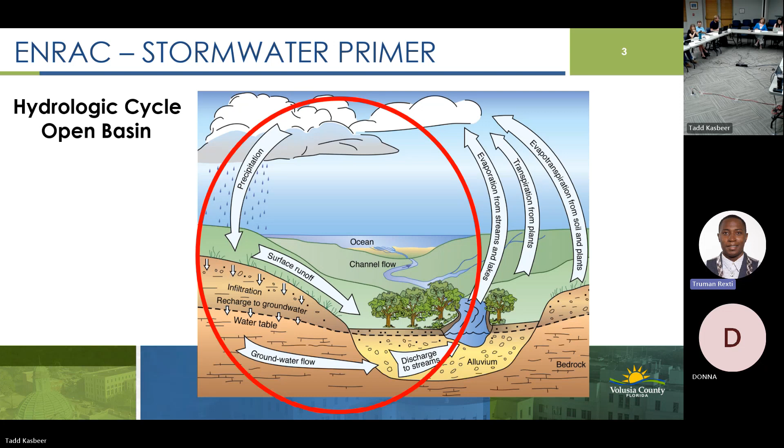So stormwater attenuation - attenuation is a fancy way to talk about flooding aspects. Stormwater rules are predicated basically on two things: one, making sure you don't flood out your neighbors, and also treating water. We'll talk about the treating quite a bit later on overall, but flooding or attenuation is the primary aspect, and usually the one where you feel the most immediate effect.

The state statutes are pretty simple in this regard. Basically, if you have an existing site, you are allowed to have the same amount of water at the same rate flow off of it. So if you have an existing piece of property with nothing on it, the amount of stormwater runoff coming off of it, both the volume and the rate, are the same amount as if you came in and decided you were going to put a Dollar General or a subdivision or something along those lines on it.

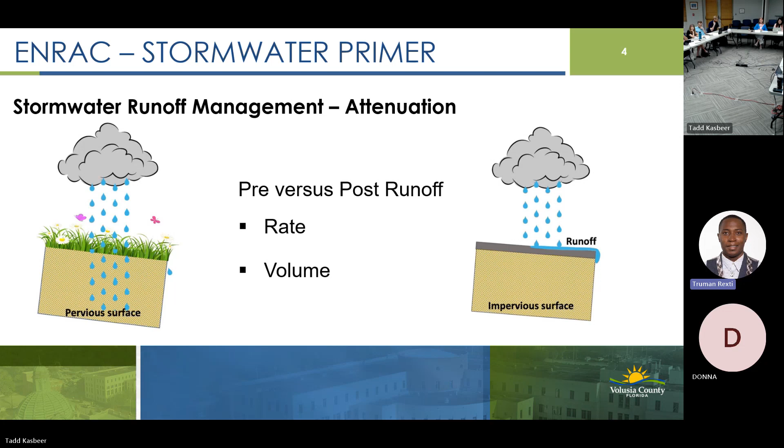So you're going to be coming in, changing the surface, increasing that runoff. It's your responsibility to hold that difference or restrict it so that your downstream neighbors don't see more water, or at a greater rate, than what they did before you built anything.

So how do we do that? We've got to manage that stormwater runoff. Surface water runoff is the most important aspect of it because, as you can imagine, it runs much quicker, moves much quicker than the groundwater flow does. So figuring out the stormwater runoff is the key factor.

So how much stormwater runs off of a particular site is based on three different factors: the overall size of the basin, the area that the stormwater is falling in; the rate at which water either infiltrates into the ground or runs off; and finally, the overall size of the storm is a large factor in how much water will be coming off of the basin.

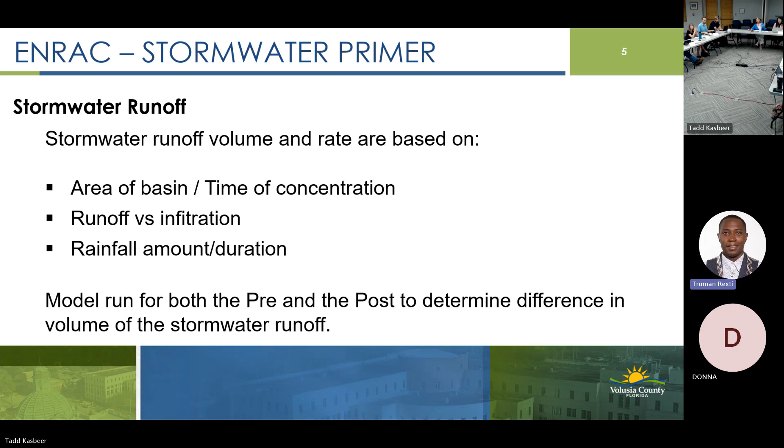Question? Yes, ma'am. Probably too geeky at this point, but given our experience with hurricanes Ian and Nicole, and the fact that we've had a couple of 100-year floods plus, do we use the most recent data set so that those events are incorporated into the reference data for determining how much water is involved?

We will get to that in just a little bit. Okay, thank you. And I'm basically taking it in the order that I just had it, so we'll get into the basins first, and we'll get into the runoff rates, and then we'll get into the storms and how we get into that.

And that is a good point, though. With everything I'm presenting here, I've tried to take all the technical aspects out of it. We won't show any stormwater models. I'm not going to get into equations, and I'm not going to ask anybody to run an integral or any of that kind of crap.

I know Tyler was looking forward to that. That's tragic. He'll be disappointed, but I just wanted you to know you were doing it.

But I am trying to keep this as simple as possible overall. One of the things we're going to do is run through this real quick, and then I've got a certain site that we've done in the last 6, 7 years—well, actually, I guess it's now about 10 years. So we can walk through it with that so you can see how these different things are applied, and there will be some technical aspects, but I'm going to skip over a good portion of that.

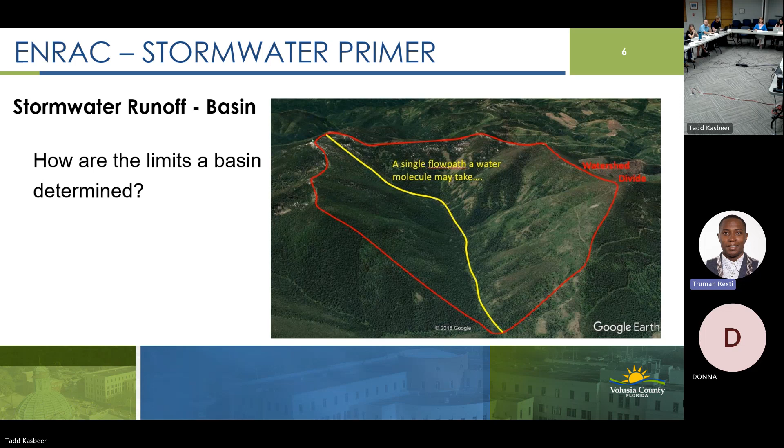So south of us into Brevard, the headwaters of the St. Johns River would be part of that basin. That said, we're not studying that entire area to figure out if your Dollar General or subdivision is going to have more runoff—you're doing a more localized sub-basin aspect of it, and that's what we'd be looking at on particular developments. We also have different types of basins; not every basin's collection point ultimately results in water making its way... Do you need to let somebody in or something?

Not every basin is open to the ocean. The basins that are, we call open basins - the water ultimately makes its way by surface path to the ocean using even a medium-sized storm. Closed basins, or landlocked basins, are pretty common on this side of the county. These are basins in which the water never actually leaves the area - it goes to the lowest point in that basin and has no flow path to get out. So there's a big distinction between the two.

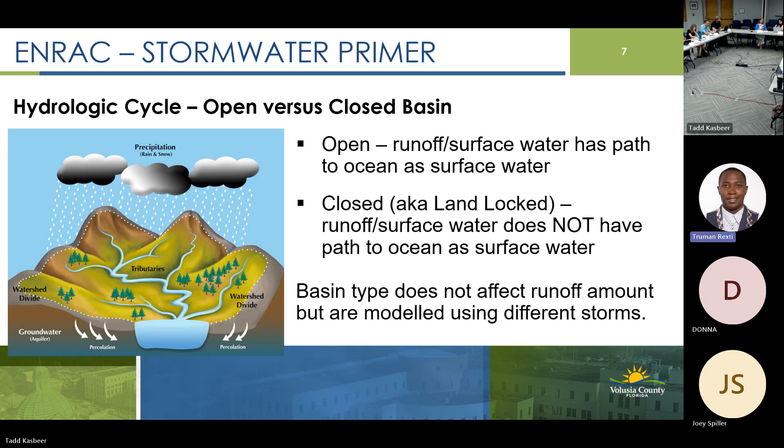Ultimately, how the stormwater is handled doesn't change very much, but it is handled a little bit differently when it gets to how we manage the stormwater overall.

So now we know what our basin size is, the next thing we've got to do is figure out how much stormwater runoff we're going to have versus infiltration. As you can see with the two pictures, you've got your pervious condition, typically what your existing site will generally look like - maybe a few more bugs and bunnies on it. Then afterwards you come build your Dollar General or your subdivision, and now you've got pavement. So the surface cover is usually your biggest determining factor in how much water infiltrates.

That said, other factors can play a big part. Slope of the ground - in Florida that's not much of a problem, but if you go to North Georgia or the West Virginia hills, you've got steep slopes. It really doesn't matter if the ground is great for soaking in water or not - the slope is going to cause it to run off. Here in Florida, where our biggest hills are 3 feet tall, that's really not much of a factor overall.

The soil type also has a big effect. If you go to the beach, you can see the water moves right through that sandy soil very easily, doesn't get impeded in any way, shape, or form - certainly compared to clayey kind of soils or organic material like potting soil, which are designed to hold that water, grab it, and keep it.

The next aspect is voids in the soils. A lot of times this is about how well the soil's been compacted. If they're bigger grains of sand, they're obviously going to have greater voids. If they're smaller types of soils, then there aren't going to be as many voids overall.

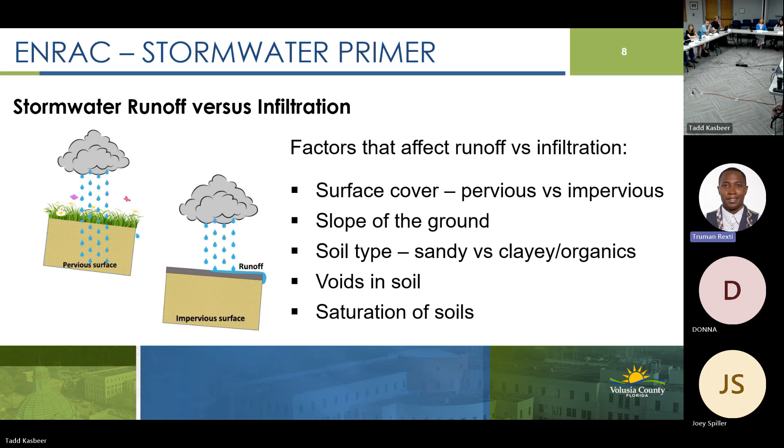Now we've got to take those criteria and turn them into something we can use in our stormwater models, because that's the important part. There are a couple different factors, like we talked about, in how we assign a value to that existing ground. The impervious surface, as you see up there, is pretty easy to assign - sidewalks, parking, buildings, asphalt, concrete, basically all of those we consider a 98. This is called a curve number, and it's not really a percentage, but it's a similar concept, so we'll just consider it a percentage for purposes of this discussion.

Basically what this is saying is that for those impervious surfaces, 98% of that water is going to run off - there's always a little bit that percolates into even the hardest surface overall, so we'd assign a 98 to that. Then you can see below the other different types of ground cover and soils you might encounter, everything from open space lawns that most of us have, to dense forest. So the other factor we talked about was the soil characteristics.

We assign soils grades, A through D. A basically means it's well drained, the water moves through it at a very good rate, it doesn't hold it very well. D soils are at the opposite end of that spectrum, you've got clay, you've got organics, things that would either slow water down or, like with organics, actually grab that water and hold onto it. So there's a range in between. That's what the A, B, C, D across the top portion is. Depending on your soil type, your ground cover, those things, you're assigning a curve number to that particular section.

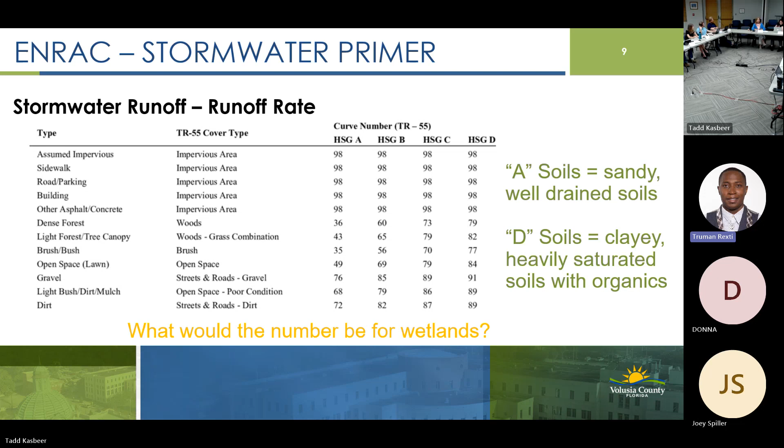So we started talking a little bit about this, the last aspect, about the math going into getting to the ponding element of this. Wouldn't the root structures of the highly dense organic areas, the high vegetation areas, create voids in your soil?

It can, yeah. Keep in mind what we're talking about is the amount of runoff that's created overall, not the groundwater. The runoff is the amount that's not retained, not absorbed in the ground. Right, doesn't percolate.

Infiltrate. So with that being said, in this process, if the foundational math - sorry for getting really technical here - aren't talking through or accounting for the root structure voids, and we're ignoring that, saying that's too complicated to throw into this equation, is that not kind of limiting a little bit of that soil storage ability there?

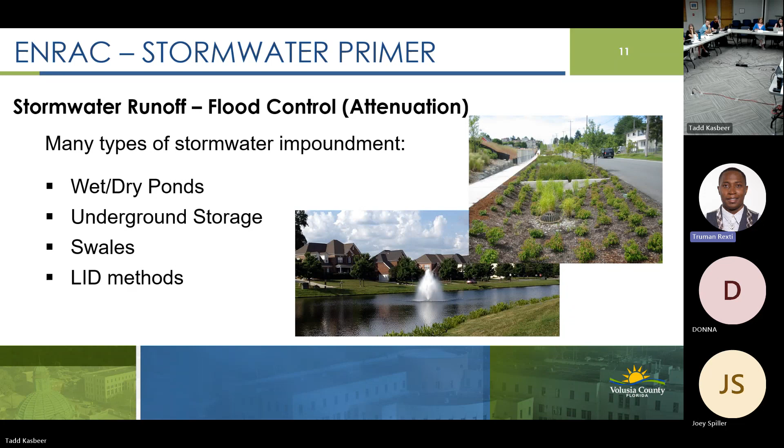Using those previous factors, we figure out the difference in the amount of water that would be running off. Now it's incumbent upon the design engineer to figure out how to impound that volume of water, or slow it down, so that you're discharging at the same rate or a lesser rate than previously. Everybody's familiar with most of the methods engineers use: wet and dry ponds, underground storage, swales, and a lot of LID methods this group has looked at. Those are the common means for tackling these issues.

So how do we go about it? We've got that volume we've figured out. That water has to be stored above the water table, since everything below is occupied by existing groundwater. So we have to go above that. That's the first factor we look at: what is the water table for the particular area overall, along with the runoff volume we just calculated.

We also take a look at the soil characteristics for the area where we're potentially going to put our stormwater pond or whatever method we're using to control the stormwater. And if it's a wet condition, we also have to take a look at the tailwater, which is the area downstream that this water might be flowing into if it were an open basin.

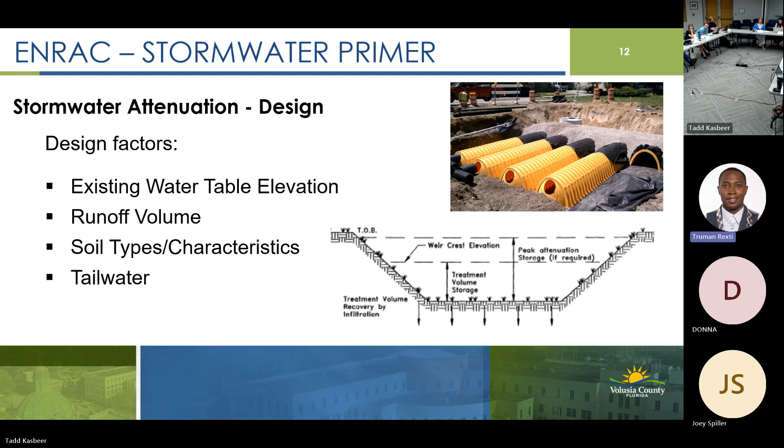So once we know what the water table elevation is, that pretty much tells us what type of system we're going to be using, whether it's wet or dry. If the water table is close to ground level overall, you're pretty much going to be in a wet condition. There aren't too many types of wet systems out there.

Wet ponds are about the only game in town as far as that goes. So if your groundwater is high versus your ground elevations, then you're going to be with a wet stormwater system. If you've got 4 or 5 feet, something along those lines, then you can start taking a look at other types of systems—dry ponds, underground storage, those types of things. But you've got to have the room, the space between the bottom of your pond or your system and that water table elevation.

Now, to Sarah Lee's question with regard to setting that water table elevation—one of the things done prior to beginning work is that you'll get a geotechnical engineer out to the site, and he'll take borings across the site to identify what we call the seasonal high water table, as well as the existing water table.

Now, the existing water table can fluctuate, so we don't rely on that. Depending on when you do the boring, if it hasn't rained in 6 months, that water table is generally going to be depressed compared to its normal elevation. Your seasonal high is basically, during the rainiest portions of the year, what does that water table elevation come to? Now, you almost never end up doing your geotech borings during that time of year.

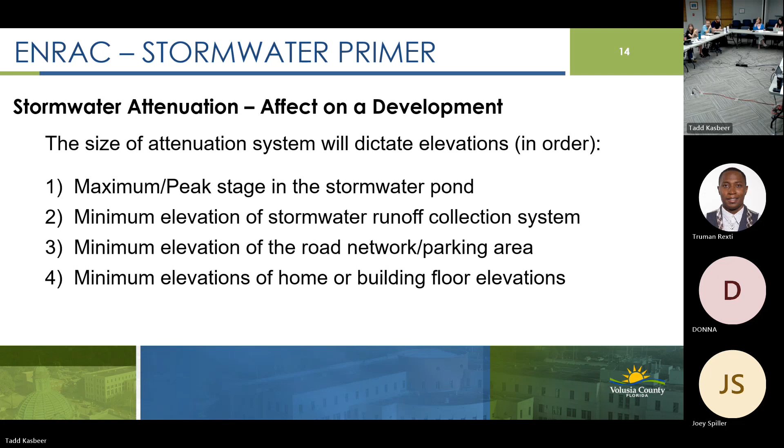So, oh yeah, I'm sorry Alex, trying to get it down there. I'm trying. Pat, you're not off the hook yet. Alright, Alex and Tyler both had questions too. I'm so sorry, Alex first, Tyler's always next. This may be a little out of sequence for what we were thinking. There's no sequence with any of that. By all means, go ahead and ask.

With that being said, using, I'm assuming, like Atlas 14 or something like that as the basis for the rainfall precipitation totals. With the Resilient Florida program and the CRS program, they're asking local governments to look into NOAA intermediate, low and high for the 2017 projection there. There's discussions to update it to 2022. If you look at that as the foundation, you've got the sea level rise element, adjusting tailwaters and things like that. But then concurrently, with that research, there's DoD research that suggests by 2040 there's 1.14 times higher amounts of rainfall than we're seeing today, and by 2070 it's like 1.2, and by 2100 it's 1.3 times more rain. Is there any intention in the county to adjust those factors to try to account for that future flood condition that the Federal Department of Defense is saying is a very real factor?

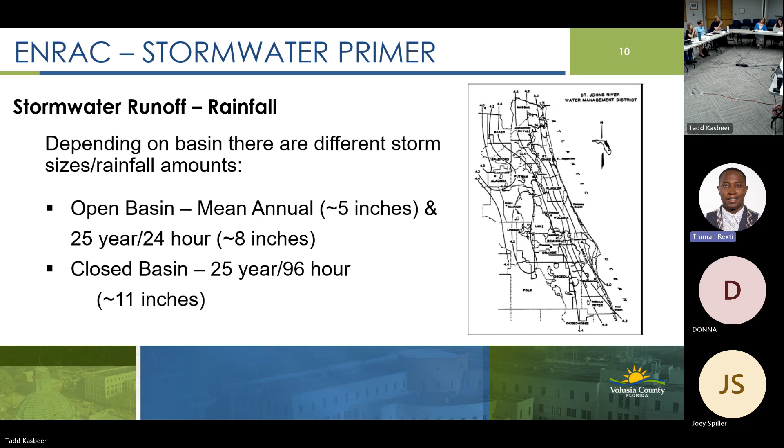So I have a few things I wanted to touch on. The first is, Sarah Lee, you were asking if we've seen the seasonal high water table levels rise over time. One of the things we have that's almost 100-year-old data now are our soil survey maps. They were done all over the state of Florida, but we have one for Volusia County.

I think it was done in the late 20s, part of the alphabet soup of federal programs. And so they mapped all the different soil conditions. If you go 5 feet down, you maybe have a layer of silt or clay or something else, and that'll be described as something you can expect. They have a lot of properties, and they'll have an anticipated water table depth on that.

And they're not perfect. This is 100-year-old data, taken by a grid method before GPS or anything else. But it's absolutely impressive how accurate it is. It matches pretty well with the geotech data that I get today on a site. If it's undeveloped and the area around it hasn't substantially changed, chances are I could plug in the soil survey data and do a pretty good concept design on it, and then when I get my real geotech, have it work. Every now and then I get surprised by something, but consistency hasn't really been the issue.

Like Bob mentioned, the way that we established our seasonal highs did change within the industry, but that's mostly because we didn't have it right originally, and we've refined our method.

Touching on the FEMA maps, they're called FIRMs, flood insurance rate maps, established to set flood insurance rates. We have different flood zones that are the 100-year flood risk zones. Some are based on models, some are based on historic aerials of, hey, this flooded during the storm that fit about a 100-year flood, so we just traced the aerial. As imagery got better and our ability to get instant imagery after a storm got better, the accuracy of those maps improved. So there's a lot of factors, like Tadd was mentioning, that led to the high inaccuracy that we had 20 years ago.

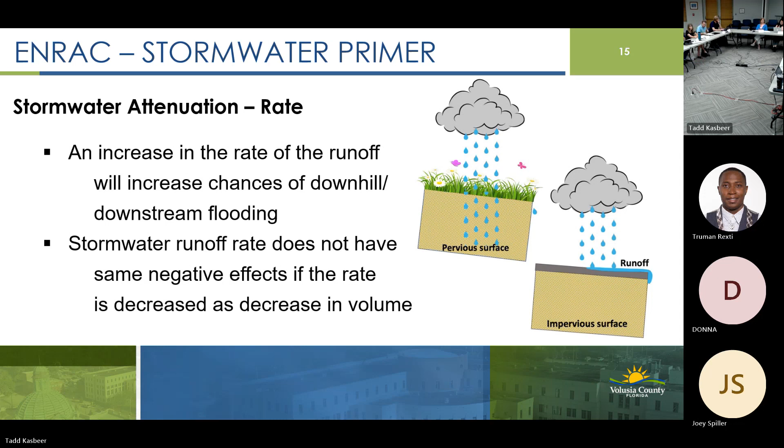How do we do that? How do we regulate the rate overall? We usually put in a discharge control structure. Usually if you look at it on a stormwater pond, it looks like an inlet. The elevations have been set such that water can discharge over time. So for example, if you've got a large amount of water coming in, but you only put in a small 2 to 6 inch pipe, you can really restrict the amount of flow of water out that way. That's generally what we do overall to make sure we're not exceeding the pre-development requirements in that aspect.

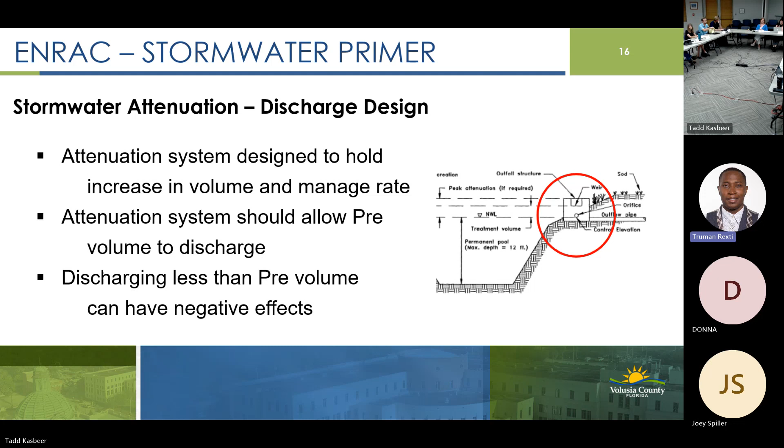All right, so we've now got a full pond, the storm has passed on. It's important that that stormwater system return to its pre-storm condition. You don't want it to recover too quickly, but at the same time, you don't want it to take too long either. The county does not regulate this aspect of it - the Water Management District, the DEP, the state, they do overall. And there are different ways that you can recover your system.

If it's a wet system, you can do it by an orifice - again, a smaller pipe that allows water to flow. You'd set it at the normal water level in your pond, pre any of the stormwater runoff, and with a small pipe it just allows a certain amount of flow to continue over time. You'll still get some percolation even in those wet ponds - it may not be going down, but it will be going out as the surrounding area water table drops after a storm. And in dry systems, you're stuck with percolation - there's really no other way for the water to get out. It just filters into the soil and becomes groundwater, which predominantly mimics the condition that occurred prior to the storm, where you had that much groundwater in the first place.

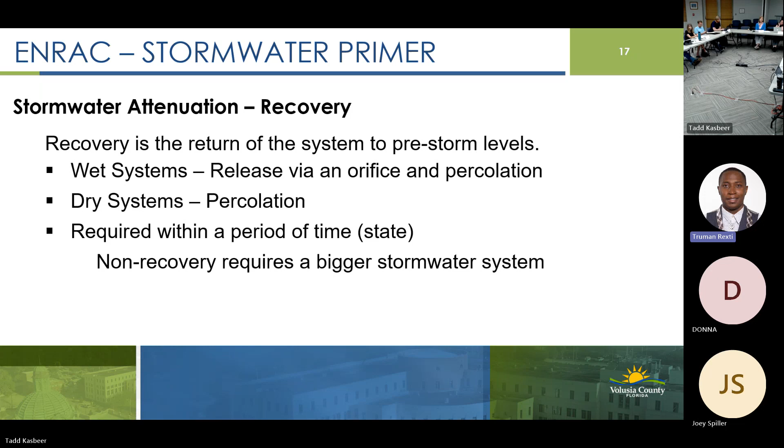So that's the surface runoff. Now we get into groundwater. Water infiltrates via percolation, and then you've got a defined water table that generally sits there. Any new water comes in and generally tries to level out. Groundwater typically mimics, in terms of its elevation, the existing ground - so if you've got a slope, usually your groundwater has a slope to it. It may not match exactly; variabilities in the soil, voids, and all those different characteristics can have an effect on what that water table elevation does as it relates to the ground elevation. But that's generally what it does.

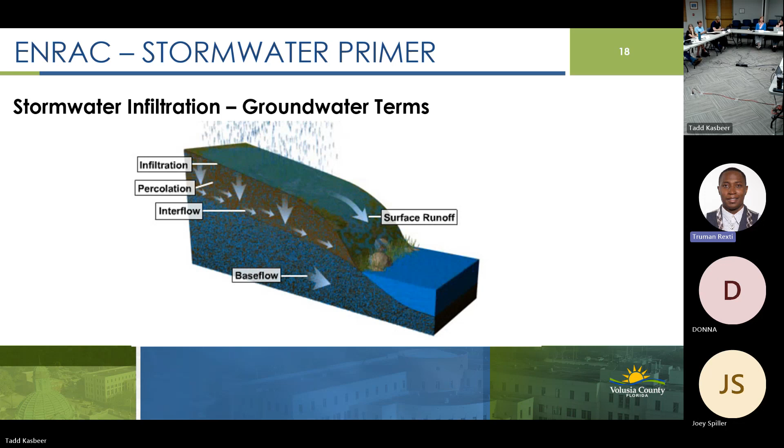So ultimately, during that storm, you're going to have that interflow, as it's identified on this graphic, working to equalize and get back to what it's used to overall. As you can understand or expect, groundwater flows at a much slower rate than surface runoff, which is why if you turn a site from grass and lawn into impervious surface, you get that water moving much quicker than it does through the ground. That's what you're trying to fight when you put in that stormwater system.

The major effect on groundwater is confining layers. A confining layer is just a soil type that really does not percolate very well. It usually acts as an impediment to flow. It doesn't mean it won't flow through that layer, it just means it takes it a really long time to do so.

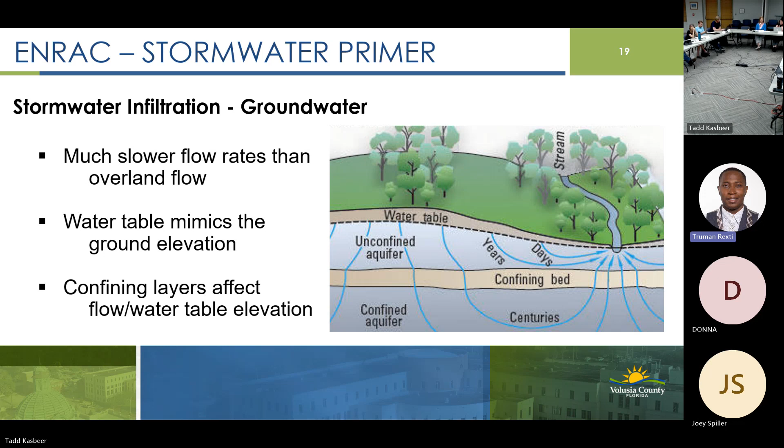That leads into discussion on closed basins, which we talked about a little bit earlier. These are areas where the water falls in that basin and the collection point doesn't have an outfall ultimately to the ocean. West Volusia has a large number of these, and a vast majority of the subdivisions in town, a lot of the developments in town, go to closed basins.

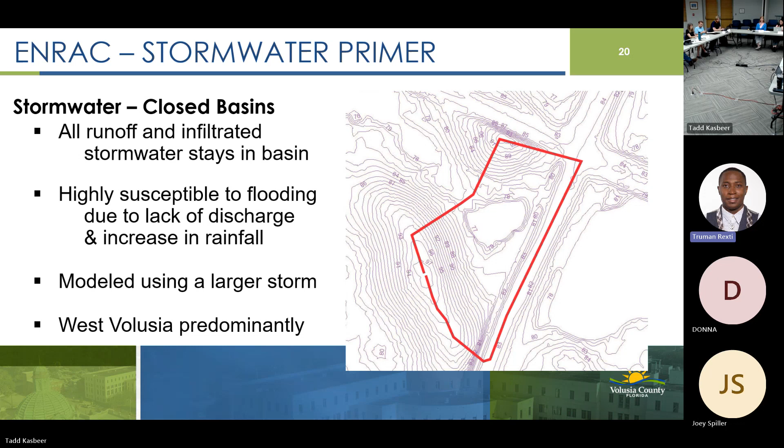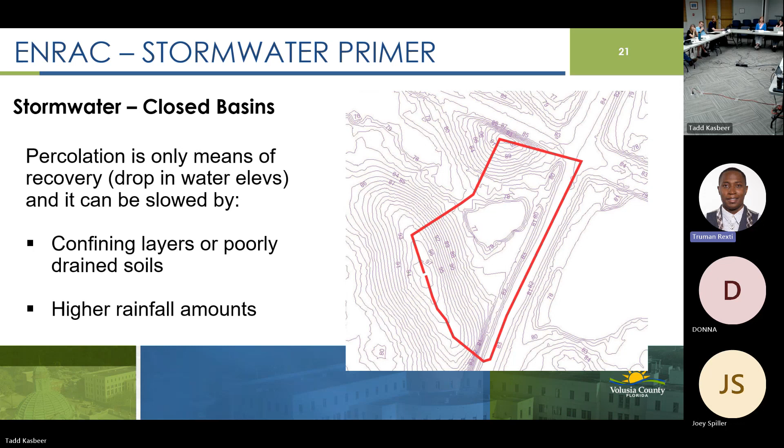The problem with that is those areas are highly susceptible to flooding, particularly if you've got a confining layer, something that really does not allow that water to percolate out. Since percolation is your only means of recovery, a confining layer really kills your ability to recover, as well as higher amounts of rainfall. That doesn't mean a big storm alone - it means continuous rain at a higher rate over a longer period of time, which is generally going to be worse for you than one localized big storm.

Yeah. The only means of recovery is the percolation.

Is there no calculation for evaporation at that point? No. We exclude it to a large part because it's a safety factor. There is some that does occur, but as far as control over that aspect of it, there's minimal control - it's greatly dependent on your weather conditions, your air conditions. And there's no good way to model something you don't have control over.

So this is the average annual rainfall for the city of DeLand. You can see, for example, back in 2000 it was a pretty nice year - 42 inches. Then it jumped up to 76, then down to 62, 53. There's quite a bit of variability really until you get to about 2009, 2010, and then you start to see things generally even out.

The issue gets to be this last 6 or 7 years - you take a look at 5 out of 6 years, you're up above 60 inches. That's a large amount of rain in a short period of time on top of a previous year with that same condition. So you get into those closed basin discussions - when you get those types of situations, you really just don't have the ability to recover, and a lot of these closed basins, particularly if there's a confining layer, you're going to hold water.

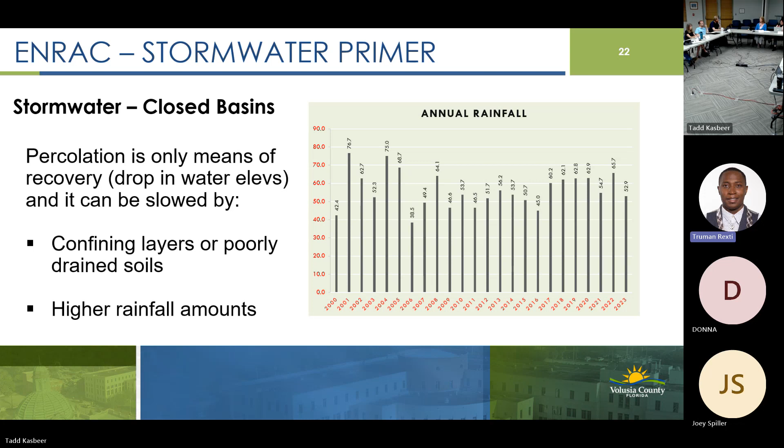So that pretty much covers attenuation and flooding aspects. I did mention we'd talk about treatment, but I don't plan on talking about this too much. The county does not regulate treatment overall. We basically leave that to the state and the feds, largely because we don't have the expertise or chemical capability to make recommendations on something along those lines.

Anytime you're designing a stormwater system, you'll take a look at the water management district criteria. When you look through their manuals, they provide quite a bit of background on the science they performed for generating the amount of treatment needed or developing how stormwater ponds work overall. We don't have the ability to duplicate that, so our recommendation is to follow those rules, or make an effort recommendation, but something that doesn't specifically rely on heavy science to arrive at it.

That said, the Water Management District and the DEP regulate treatment. Treatment is basically picking up that first flush of water that falls in that basin. The idea being that if pollution is above ground, that water hits it and either picks it up or mixes with it and moves on. Any later portions of the storm are picking up at such a diminished rate that it's not worth tracking. So your stormwater pond or system must retain that first flush.

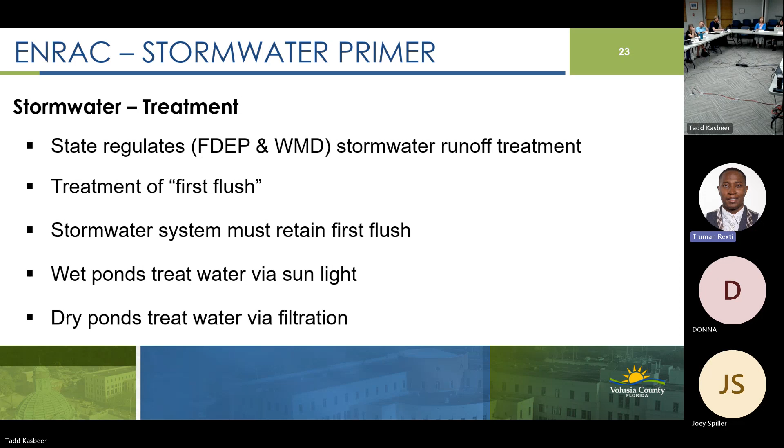So that covers the basics on anything. Go ahead, Bill.

Even though the state regulates treatment, they have special basin criteria for impaired water bodies, right? Correct, different areas are treated to a different level. There are different treatment standards overall, I just gave it a quick brush. The state has water quality data on a vast majority of the basins to identify which ones may be impaired. As part of that, if it is impaired, there's a different criteria for your stormwater, depending on the type of impairment. The vast majority of them are nitrogen or phosphorus.

Yeah, the things you typically find in fertilizer, strangely enough. So your pond design gets modified to specifically try to attack that particular type of pollutant, just keeping it simple. Most of the microbes are doing denitrification, handling the nitrogen load, but the phosphorus typically accumulates unless there's an uptake by plants, and then those plants get harvested and hauled away. There's also heavy metals that can accumulate, which are also not typically handled by microbes.

With wet ponds, we have trouble with phosphorus removal, maybe getting 40% removal. So if we need higher than 40% removal, you usually have to pre-treat with a dry pond or use some other system modifier to get the phosphorus. When you have a dry pond, it goes in front of the wet pond, which means your entire development has to be built up so you can get that positive flow into your tailwater.

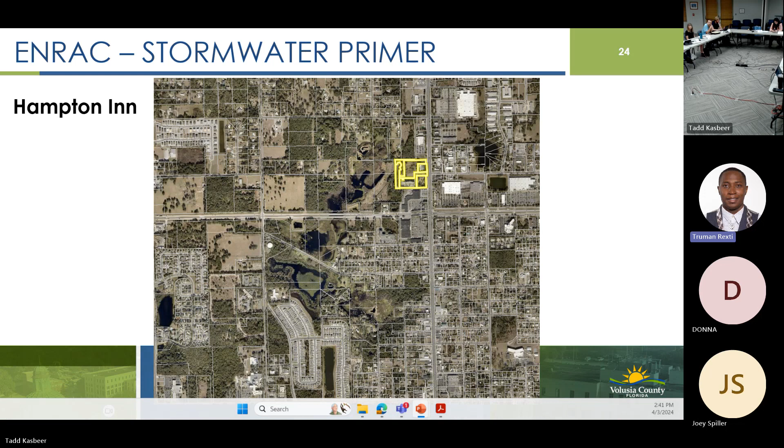The Hampton Inn site is north of town, northwest of the quadrant of US 92 and 17, that area overall. I'm assuming pretty much everybody is familiar with it, but I highlighted it. To the west, you've also got the Lake Gertie area. Part of the reason I chose this was for that basin, as well as being familiar with the area. Lake Gertie Basin is a closed basin.

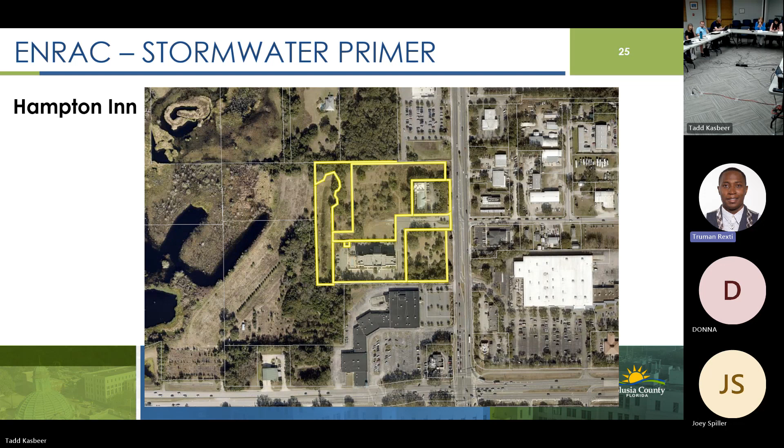Water that percolates down to Lake Gertie doesn't go anywhere. So during the hurricanes, water level there rose quite a bit back in 2005, 2006. It even got into some people's homes on the south end for that reason. But this site, the Hampton Inn site outlined in yellow, all of this ultimately drains down to the Lake Gertie Basin. So it's a portion of it. The Hampton area is actually located basically at the end of this.

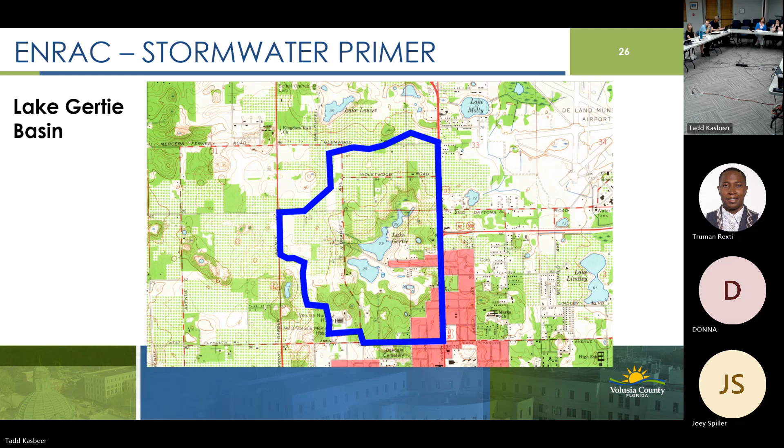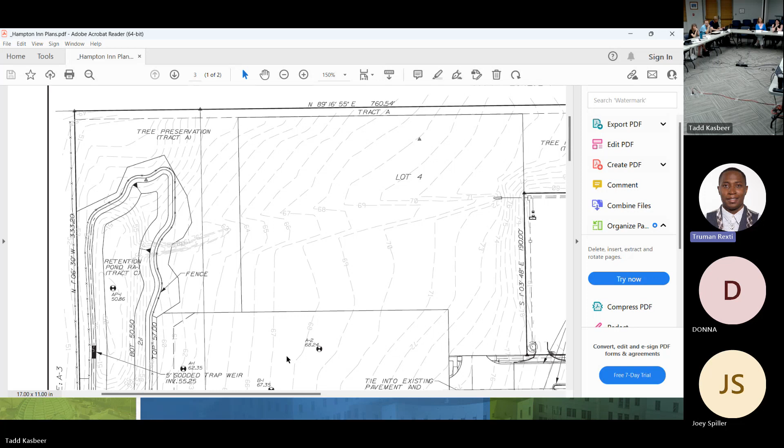When you've got this much fall, it makes it pretty easy to figure out where you want to put your stormwater pond. Water likes to go downhill, so you're obviously not going to put it next to US 17. You're going to put it at the bottom portion of the hill, which is what we've identified for doing. So we're using gravity's effect on stormwater to get it where we want it, either as groundwater or as stormwater runoff. Now, as a part of any of these developments...

We'll prepare a set of stormwater calculations. We've had the survey, we know what we're dealing with, and now we've got to start doing some of the modeling we talked about to figure out how much stormwater runoff is going to occur versus the pre-existing conditions.

So as part of our calculations, we generally put in a summary. We include some reference maps so that everybody knows the area we're talking about, a picture of the existing conditions. Tyler had mentioned, for example, soils maps. This is one of the things we included so you can see what kind of soils types are responsible. We include the floodplain as identified at that point in time.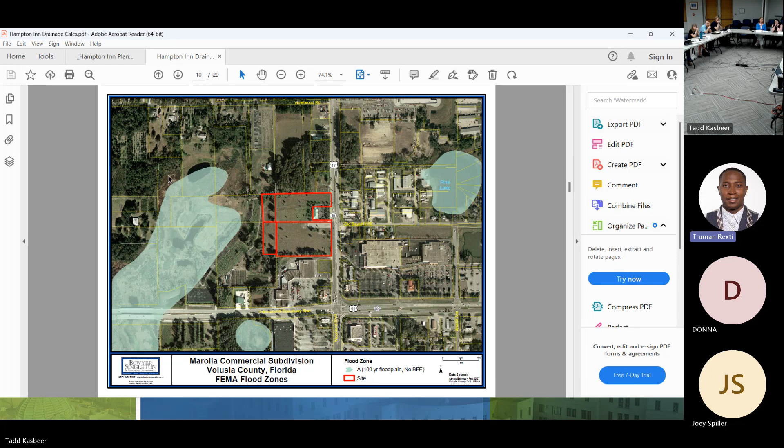Again, you can kind of see what I was speaking to a little bit earlier. That was the line that FEMA identifies. You can see it doesn't clearly match up with what the aerial has and what the actual existing condition was. They were just doing the best they had with what they got. So that would be some of that.

So the first thing we're going to look at is our pre-development. We take a look at the existing condition, take those contours we saw previously, and identify our stormwater basins. Stormwater basically runs perpendicular to our contour lines. That's the premise for figuring out where the water goes.

This was the high area over here at 17, going to Lake Gertie at the bottom area. You can see the water generally flows from east to west, or right to left. Prior to the Hampton Inn going in, there was a bank on the property with this initial driveway for access. As a part of their development, they had cut in this small stormwater pond where the water would overflow from the bank site via a ditch down to this stormwater pond.

So you can see this is the basin delineation. This was, in point of fact, its own sub-basin. All the water that fell in this area made its way here. Then, if it got high enough to discharge, it would overflow into Lake Gertie. If it didn't, it would percolate into the ground and the groundwater would move down to Lake Gertie. We want to make sure we're accounting for the existing condition, which is why we spell that out and identify it as its own separate basin. But on the north side and the south side, those are still Basin B, ultimately making their way down to the Lake Gertie Basin.

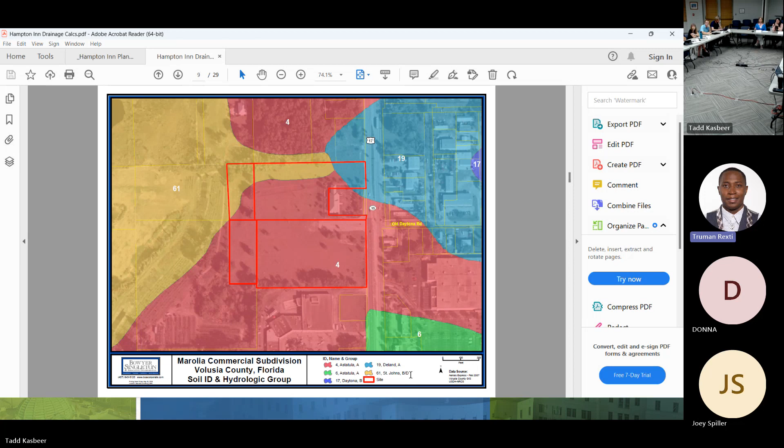So when you get into Basin B, there were two different soil types. Some were A soils - go back up here - so 4 is Astatula, which is an A soil. Then you had 61, which was a BD soil, so you take the worst case scenario and treat it as a D. That's why when you take a look at how we're prorating the curve number, we've got one number that's good and one that's bad. You make that determination based on the amount of area, calculate that, multiply it out, and come to an average.

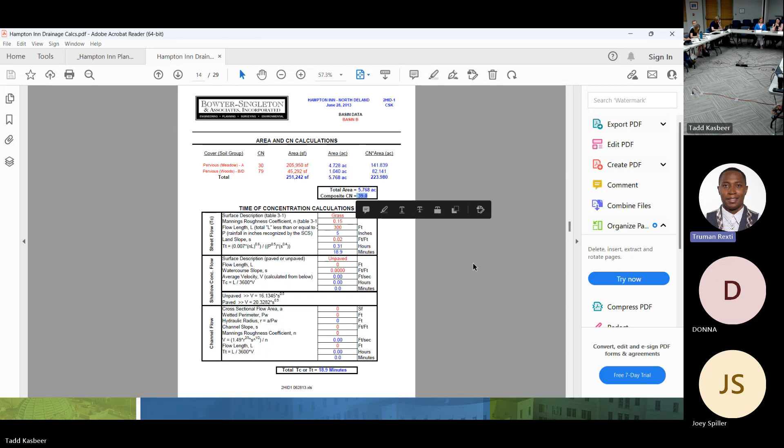And that's what you end up with for your stormwater model for your curve number overall. Again, it's a low number, which means it's soaking a lot of that water in overall. So we've got to maintain that.

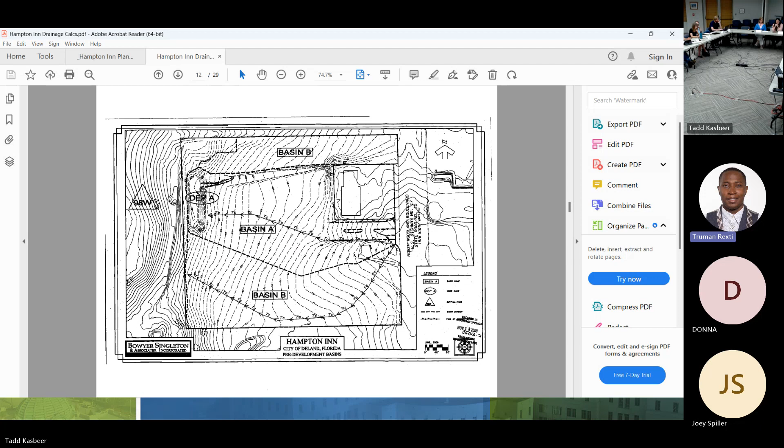One of the things we'll do is, because there is a depression, or in this case actually a pond, we just consider it a depression in the precondition, but we have to model that. We can't just assume or ignore that portion of it. It is holding water, it's impounding that aspect of it, so we've got to make sure we model that in the system overall. So we take that survey information, figure out what the volumes are based on the elevation the water would rise to, put all this into a fancy little computer program, and it tells us our volume and our rates overall.

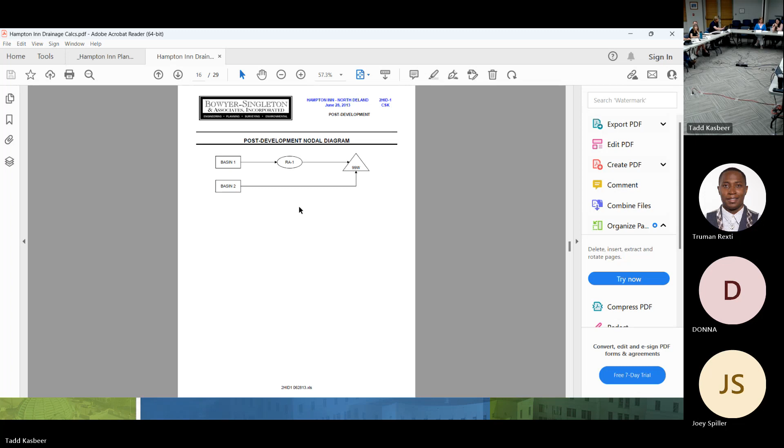Then we do basically that same thing with the post-development basin. We'll put down the different improvements we're putting in. For example, up here, this was part of B. We're not touching anything over here, we're not impeding that, that still flows. So we're trying to make sure that stays out. We don't really want to bring that into our system, or have to treat it or anything along those lines. It's naturally existing, so we want it to stay that way to mimic the existing condition as much as possible. On top of that, if we bring it in, it increases the size of the stormwater pond more than necessary.

So we'd separate that section out, which becomes basin 2, and then we've got basin 1, which now is the area that we've made changes to.

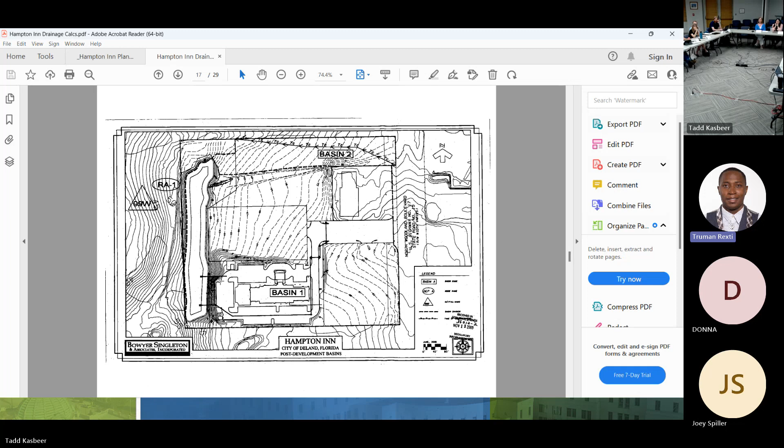And again, we're going back through, determining the area of the bank site, the hotel, pool, sidewalk, parking areas, coming up with that total area. Then again, because once water falls in a retention pond or wetland, once water hits water, it all runs off, we consider all of that area impervious surface, even though that first rain portion is going to immediately soak in and be groundwater. It's a safety factor that we apply in there.

Overall, if we take all of those and prorate them, we figure out what our curve number is in that post condition. We basically put in our pond as the depression now, and run all of that to figure out what amount of discharge we're going to have at that point in time. We know to size the pond for that volume, so we don't have to worry about that aspect when we specifically model — we're just worried about the rate.

Now, one of the things we also take a look at, which we talked about a little bit, was treatment. Obviously you have to treat everything. This is the criteria that the Water Management District basically uses, or used at the time. There were two different categories you looked at: the amount of impervious versus the overall basin. If 1.25 inches over that was greater than 1 inch over the entire area, whichever number was greater, that's what you used for your volume.

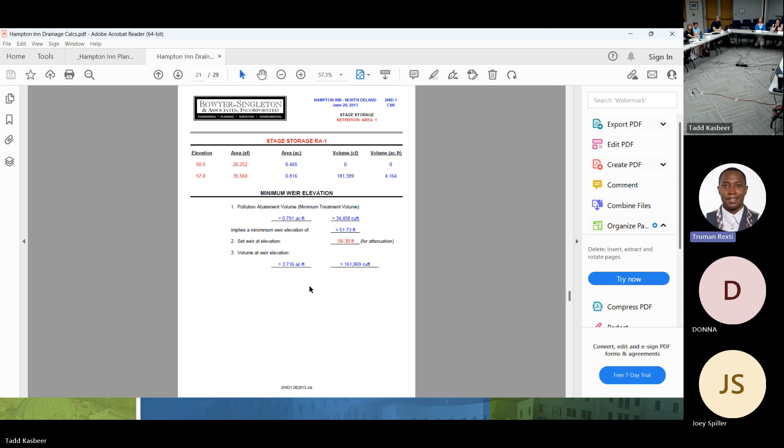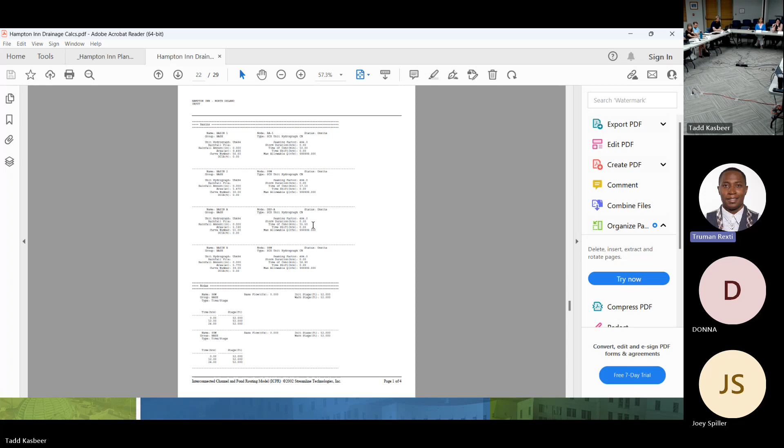So when we calculate the volume in our stormwater pond, we put in that factor as well as what we got from our model to identify our discharge control structure. That in itself is probably more sciencey than it needs to be, but we use that model to predict all of that. So this is the input. As part of the calculations, you always give the input, because unscrupulous type people can go ahead and make changes in there and not publicize it. You want to make sure you have all your criteria that you've used for identifying and running your model, so that if there are any errors or anything needs to be questioned, it's all there.

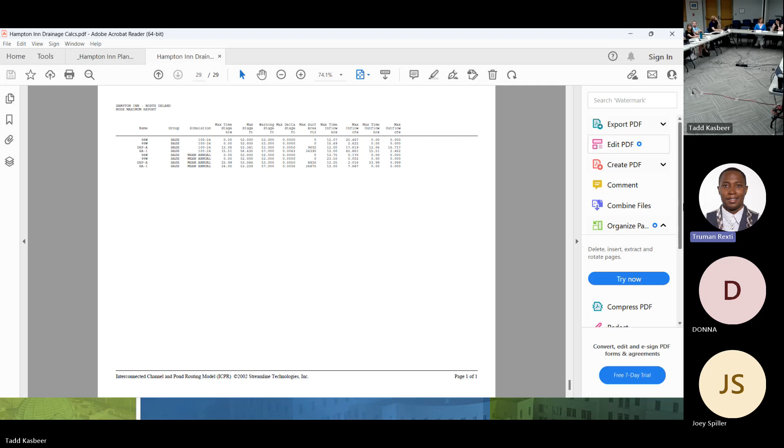And then you go back to this lovely little printout at the end, and this is where you're ultimately making the comparison between the different rates. So depression A, its discharge, and then 98W — I won't get into what the terms mean, but 98W is basically Lake Gertie in the pre-condition overall. So you're looking at what discharge goes to that.

And depression A was discharging 12.6.

Pardon me, I got it backwards. It was discharging 16, and in the post condition we're discharging 2. So you can see we're not discharging very much water at all. That's what your goal would be overall with your system, and that's the requirement you have to meet to get your system in place.

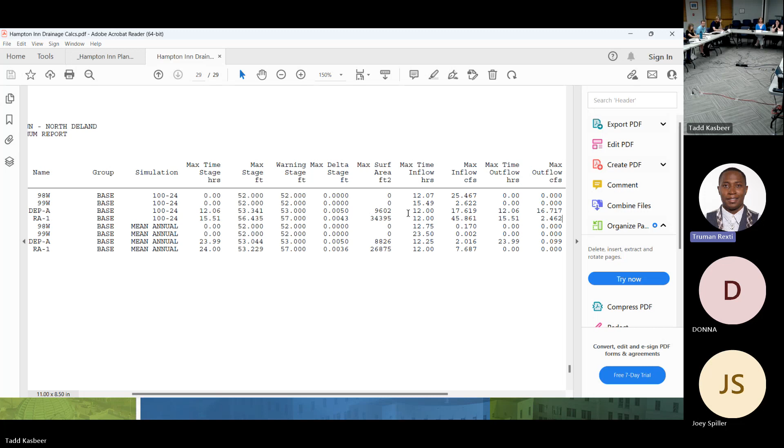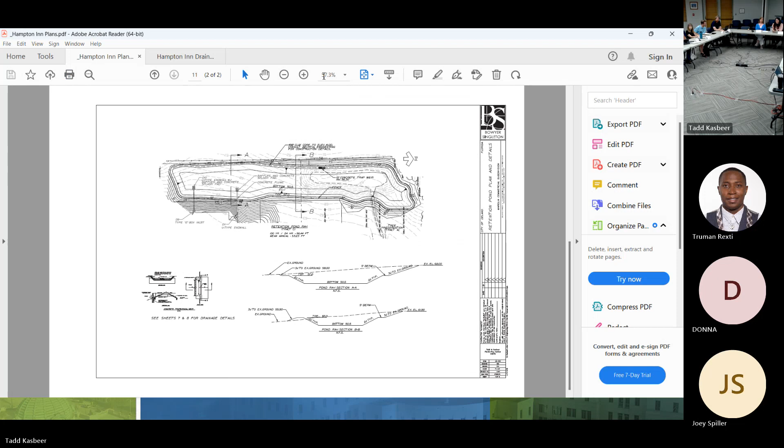Now there are different things you look at outside of your calculations. The numbers are great, that's important, but when you go to your plan, one thing we mentioned earlier was where do we put the pond? We put it at the low spot. When you've got a slope like this, which isn't the regular condition we talked about, basically on a hill, we've built up this downstream side, this being west, the right being north. We've rotated 90 degrees, but you've got a situation where you're building up on a hill, and now you've got the possibility this area may have percolation and actually cause a problem.

So for any stormwater ponds built on hills, one of the best things you can do is make sure the water doesn't percolate through, so it's not blowing out that side and you lose your stormwater pond.

Remember back, I think it was during the 2005 hurricanes, on the west side of town at the Cascades off of 15A, the new section has a pond at the top of the hill, and it had that same exact condition where there was a lot of water coming through, much more than any of the design storms had, and it blew out that side, and all that water ended up in the depression to the south, that sinkhole down there, which is a problem.

So we designed this, and one of the things we put in there, just to make sure, even though we're not really causing much of a bump, that amount of water moving this way is different than what it's typically used to, we went ahead and had them put in what we call a clay core, basically just a line of clay. Remember, clay doesn't percolate very well. It does percolate, but not very well. Basically that cuts off that flow of water in that particular direction.

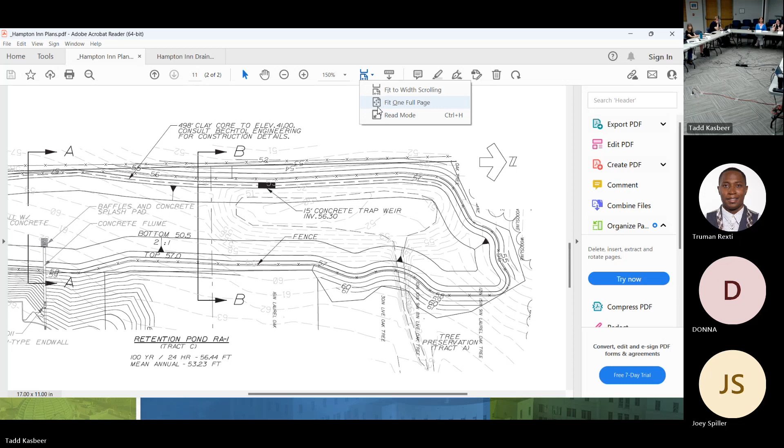No, never had a problem with it. This was built in 2014 and hasn't had much of an issue. Now the benefit it has at this point is that the only thing actually built is the hotel, so it's the only thing utilizing this pond. The pond is designed to be able to take the culvert and this particular lot, not this one. But because there's nothing else coming into that space, the pond is a little bit over designed at this point. I'd love to say my ponds never overflow, and they haven't yet, but that's not why in this case.

Yes ma'am, yeah, everything on that side, sorry, everything ancillary to that use. Sure.

How do you envision that system working there? Or, I don't know if Hampton owns that, are they going to utilize that same retention area, or are they going to have a separate retention area? I haven't actually looked at their particular site plan overall to know exactly what they're doing.

When we do a subdivision like this, people think of subdivisions as homes. It's not, it's a division of property overall. This is a commercial subdivision that created lots 1, 3, and 4 to be built on in the future. We do design the pond to account for certain parcels. Like I said, 1 and 3 are both included in this one, but we assume a certain amount of impervious surface, and that's generally how we do it with our residential subdivisions as well.

As long as they're not exceeding that percentage, and I don't remember exactly what we'd assumed, whether it was 60% or 25%, not 100%, it wasn't 100%. If it exceeds that percentage, then they'd need to do something on their side, or they could potentially come back and modify the pond. You can see there's an area over here that we left so the natural flow of this section wasn't disturbed. They could also increase it in this direction, or they can go ahead and do something on their particular site overall. So there are different options, but yeah.